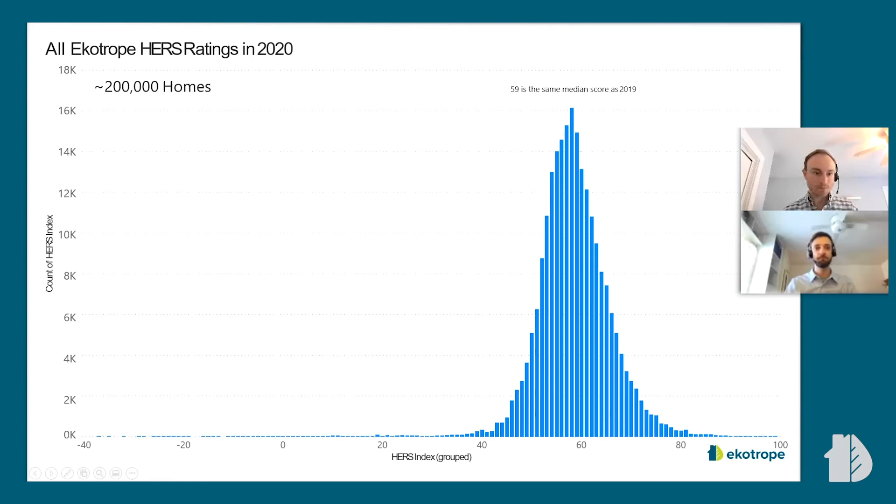Okay, now that we've laid the baseline, let's start things off with a little quiz. We don't have a live audience, unfortunately, but you can play along and try to answer the questions in your head. So a little competition, and I'll have Jake try to answer this question. What state would you say had the most of the lowest 1,000 HERS index scores that were done through Ekotrope in 2020?

Interesting. If I had to guess, I'm going to say the Ekotrope home state. I'm going to say Massachusetts. Massachusetts. Okay, keeping it local. I like it. Pretty good answer.

And it's a trick question because I'm going to give it a split decision. It's really hard to call between Massachusetts and Minnesota. Both had a very high share of those lowest 1,000 HERS ratings. So some really great building being done in both of those areas, and potentially correlated to stringent energy codes as well as good utility efficiency programs that are helping to incentivize builders to build efficiently.

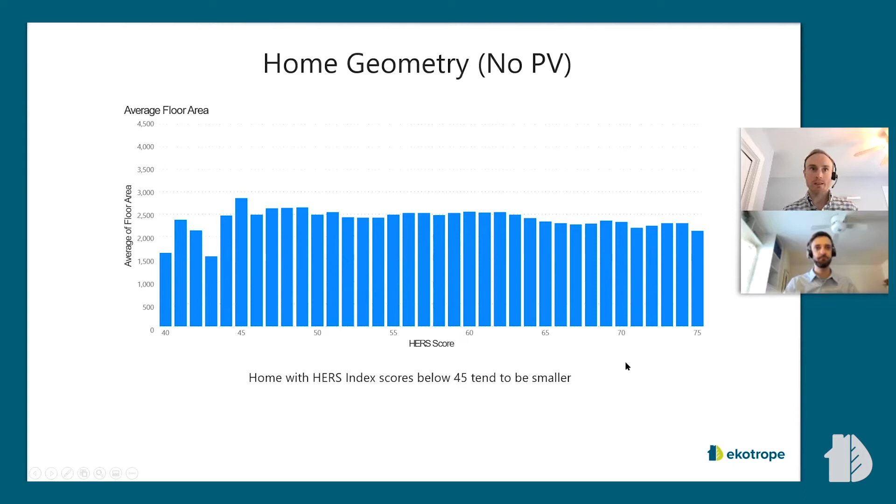But what you do see here in this chart is that when we get towards these really low HERS index scores, 40 to 45, that floor area average tends to drop. So you'll see pretty significant signal here in terms of the really low HERS index scores. Those tend to be smaller homes as well. So we'll dig a little bit more into that in future slides, but something interesting to see there.

Okay, next let's take a look at heating equipment. A very important aspect of the home's energy efficiency, especially in cold climates, is the heating equipment. So these charts are getting a little bit more complex, but let me explain what's going on here. On the top, we're looking at a distribution of the heating equipment type by HERS index. And then on the bottom, we're looking at heating equipment fuel type by HERS index. So the bigger the bar in each of these sections means a higher percentage of the homes in that HERS score range are going to be using that technology or that fuel type, right?

So if we start here on the bottom, looking at this heating fuel type by HERS index, you'll see that up here in the high HERS score ranges, 70 to 80 to 100, we've got a pretty big chunk of this dark blue bar, and that is electric. So you're seeing electric equipment on higher HERS index score homes. As the scores drive lower here to the left, we see a big chunk of this light blue. So as scores get lower into the 60, 50, 40 range, we're seeing the heating fuel type is dominantly natural gas by a very high percentage.

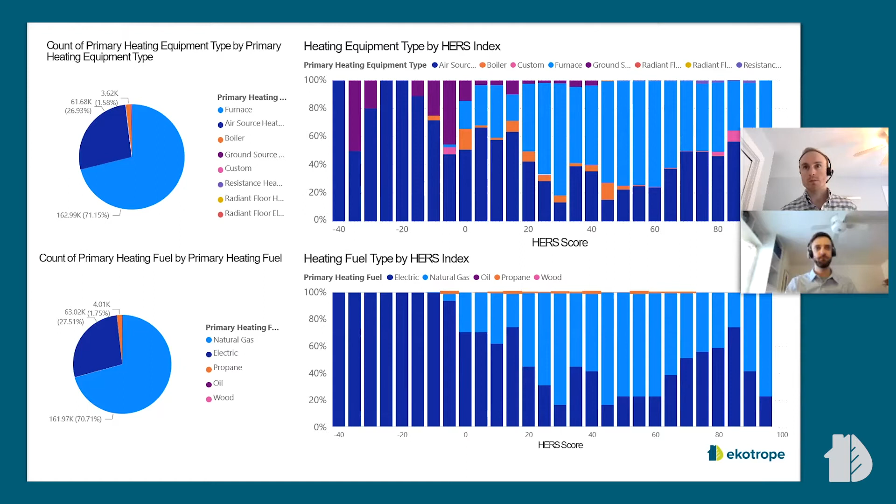Now, if we look a little bit deeper up here on the top and we break that fuel type into equipment as well, we see that this light blue matches up fairly well with the natural gas. So we're seeing that these natural gas homes are typically using natural gas furnaces. That makes sense. And the electric section is generally air source heat pumps until we get into these really low HERS index score homes. And then you start to see this dark purple up at the top come into play, and those are ground source heat pumps. So even more energy efficient than air source heat pumps as we start to get into those very, very low HERS index scores.

Okay, moving on, looking at both heating and cooling efficiency. So we've got heating on the left, just looking at AFUE for heating equipment. Cooling on the right, just looking at SEER for cooling equipment. And you'll see mostly the trends that you would expect, but with a little bit of subtleties.

So looking at heating equipment first, as we drive scores downward, moving to the left on this chart, we do see the AFUE rise. So more efficient heating equipment, getting up all the way almost to 96 once we get HERS below 45 in terms of an average AFUE. There's a little blip here around HERS 55 to 60, where heating efficiency actually goes down. Pretty interesting to see that. I think it's actually a bit of a misleading trend in the data.

I believe what's happening is that you've got a lot of homes that are in this HERS index range down in Arizona and Texas and climates that are generally fairly warm. So they are investing in cooling equipment rather than heating equipment. And so this is just kind of a chunk of southern homes where heating is not as important. It happened to fall in that range.

Over on the right, we've got SEER by HERS index. So interesting thing here is that it's actually pretty flat across HERS index scores until you get down to about a 40. So you do see a very, very slight increase, but mostly around a SEER 14, a little bit above a 14 average in terms of HERS index. And then it starts to drive up once you get to 40 and below. I suspect a lot of these homes here are actually mini splits or ground source heat pumps that carry both a high HSPF as well as a high SEER with them.

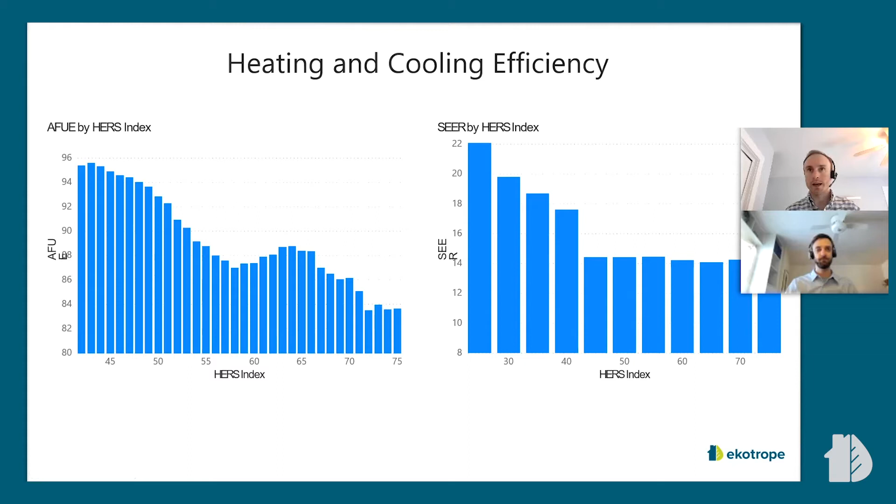Okay, let's break it up. Let's do another quick quiz here. So to the audience and to Jake, what would you say is the most common water heating fuel type among homes with the lowest HERS index scores? That's going to be interesting, especially from that last slide where you said a lot of homes in the low range move to electric, so they can have the solar, some split between natural gas and electric, but I'm going to say natural gas. All right, natural gas for the lowest HERS index score homes.

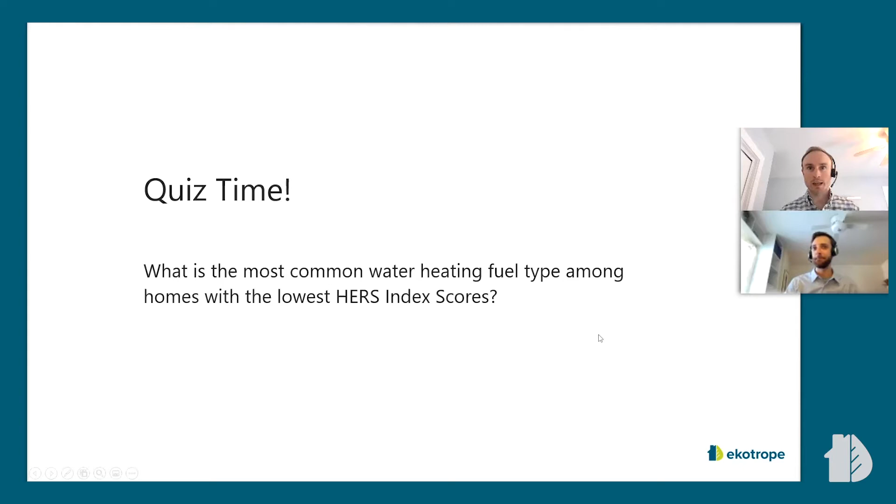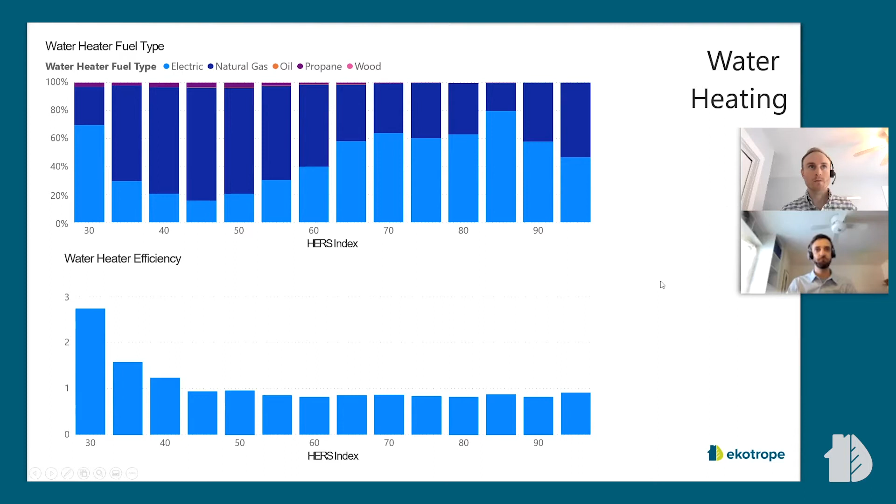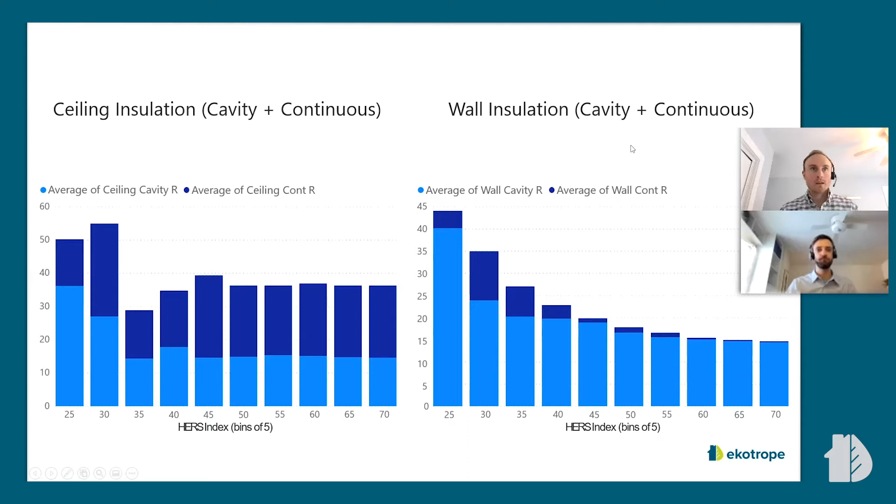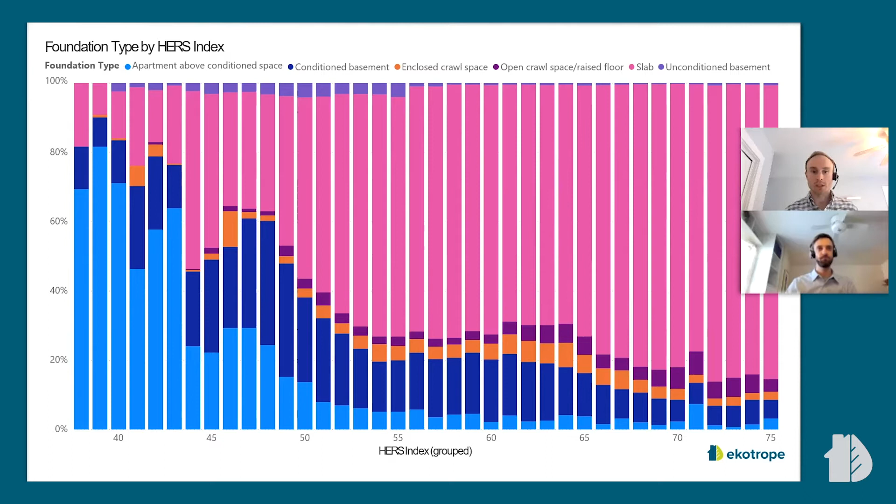And this is telling us that as you get to these really extremely low HERS index scores, you're actually mostly looking at multifamily units that are sharing common walls, common surfaces with other units.

Okay, let's do another quick quiz here. So we're going to be looking at mechanical ventilation next. Jake, would you expect homes with lower HERS index scores to tend to have higher or lower mechanical ventilation rates? Well, we've been hearing a lot lately about how everybody's trying to build tighter homes. It makes you wonder, right? Does that mean lower ventilation too, or does it mean up the ventilation? I'm going to say that they're cranking the ventilation. Higher ventilation, that's my guess. Higher ventilation for lower scores? Cool. Yep. Good thought.

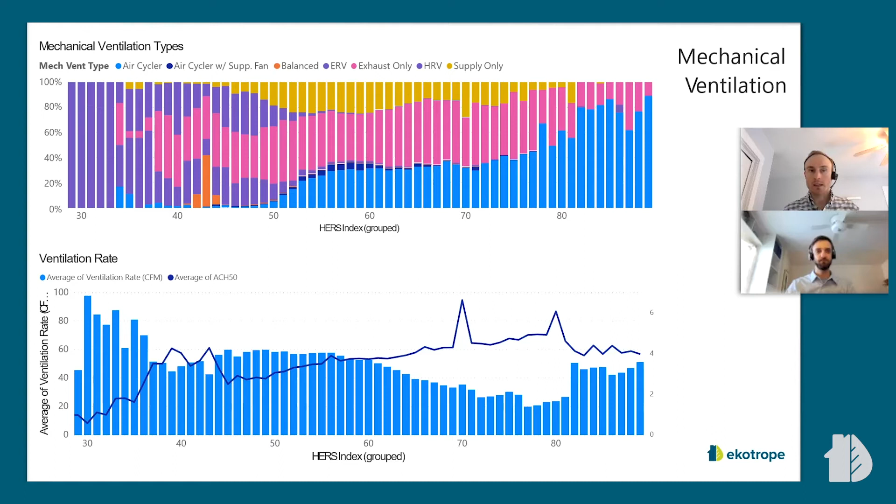So you kind of get that whole picture. Once you get down into this very low score range, you've got a super tight home, low ACH 50, you've got a lot of mechanical ventilation, and it's got to be ERV and HRV to recover that energy.

Okay, let's jump over and look at lighting as well. Lighting can have a really big impact on the HERS score. And in a HERS rating, you basically have three options for rating lighting. You've got incandescents, CFLs, and LEDs. They're called different things in the RESNET standard, but that's usually what you're looking at.

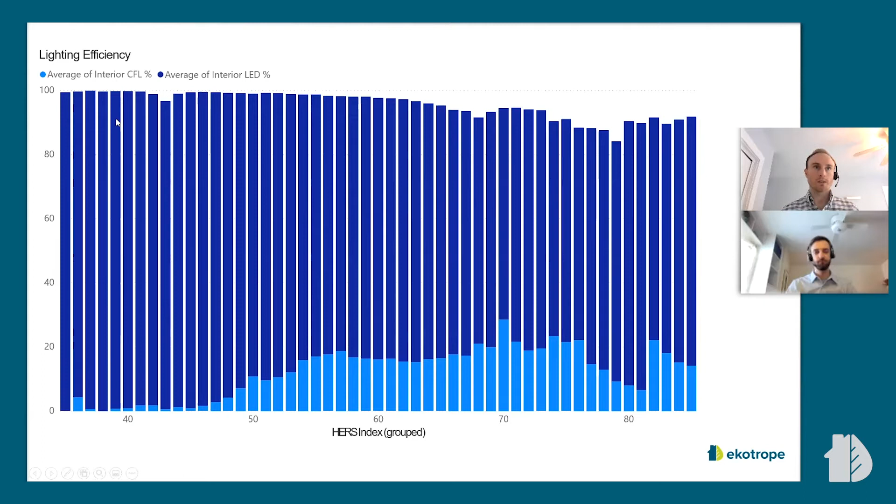But as we start to drive these scores lower, down towards 50 and below, we see there's pretty much no white space at the top here. So basically zero incandescent lighting. CFLs, this light blue, also drops near zero and to zero in some cases. So very little CFL lighting. We're looking at almost 100% LED lighting in these super low score homes.

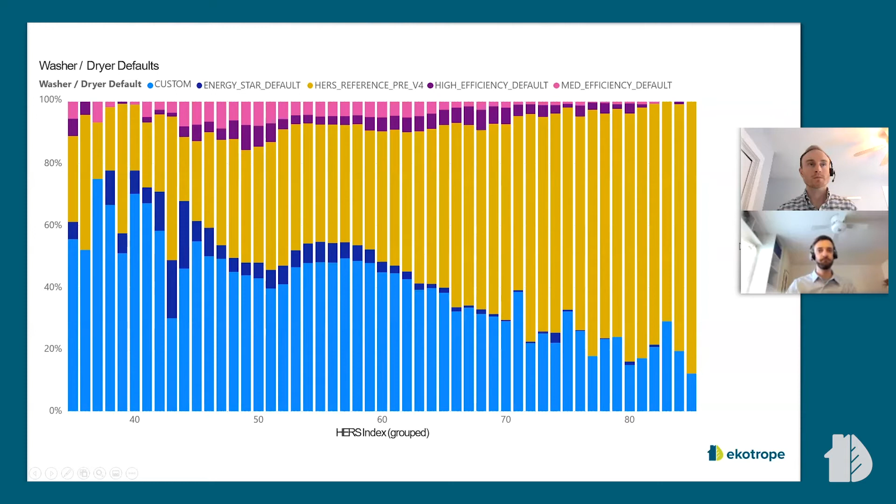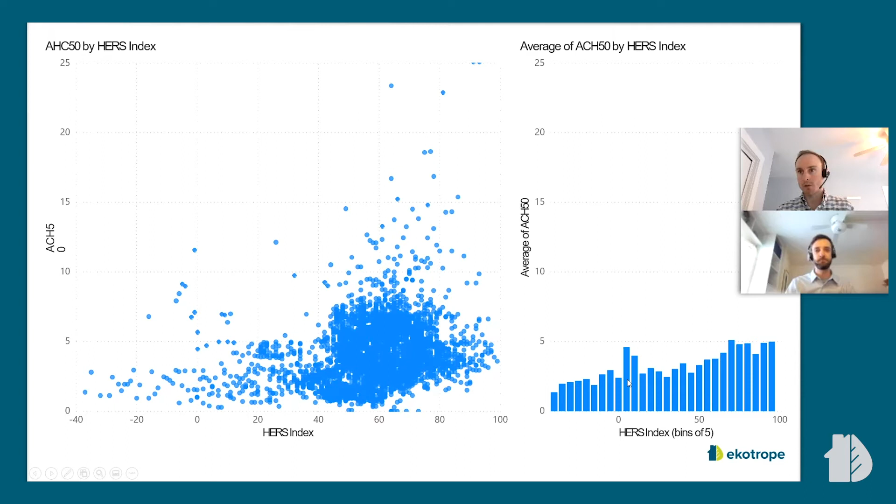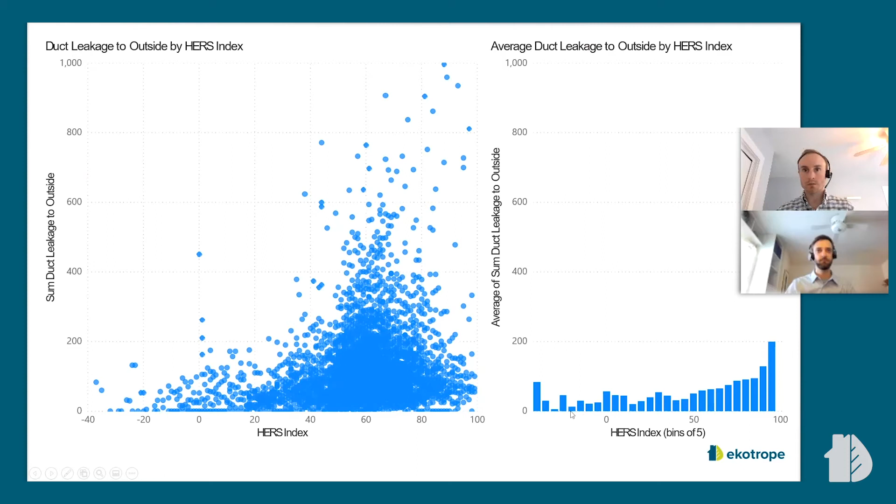All right, we're getting towards the end of this section. So let's do a final quiz here. So if we look at homes without PV panels, so without that supplementary power generation, what would you think, audience, and Jake, I'll have you answer this one as well. What would you say the lowest registered HERS index was in 2020 in Ekotrope without PV panels? I remember at last year's conference at lunch, we were talking with some raters and we were going around the table to see what they had seen. And if I recall, the lowest I heard at that conversation was a HERS 34. So I'm going to say 34. Let's see what happens. 34. That's a really good HERS score without PV. Extremely low number. Pretty good guess.

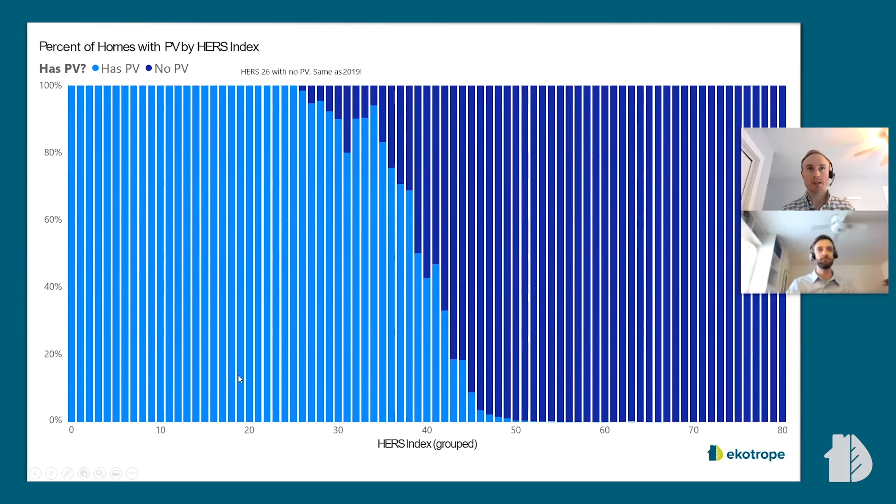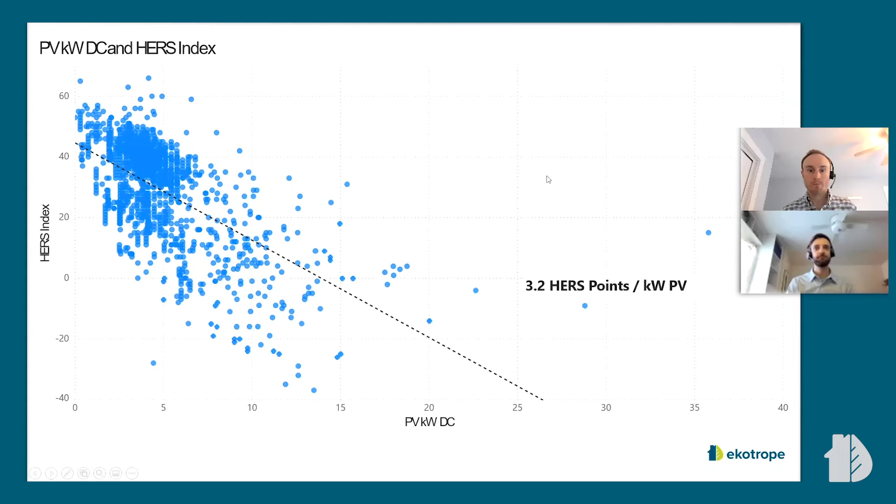All right, so we talked about how to get to low HERS index scores. I didn't mention anything about ACCA 310 because in 2020, ACCA 310 wasn't a possibility. In 2021, it will be a possibility, and a pretty exciting opportunity, I believe. So Jake is going to take over and talk about what 310 is, as well as what's the opportunity? How does it have a chance to impact ratings?

Yeah, thanks, Cy. And next year, I'll sign you up early. I'm excited to see the same presentation again with some ACCA 310 HVAC grading information in there. Absolutely, stay tuned. So yeah, I want to talk today about what is HVAC grading, get a lot of questions about what it's projected to be, how it'll tie into the HERS rating. And also we want to touch on, is it worth it? So without further ado, let's just jump on in.

So HVAC grading, we've heard about it, we were talking about it, and basically it's a way of grading the installation of an HVAC system on a home. And it goes on a grading scale of 1 to 3, very similar to what we're used to in insulation grading within the walls. The only difference here is that HVAC grading is, I believe it's billed as, the carrot without the stick approach, or in other words, there's only room for improvement. Your HERS score can only go down. It can't go up as a result of this, right? It's not meant to penalize people, but it is meant to provide benefits should you choose to do it.

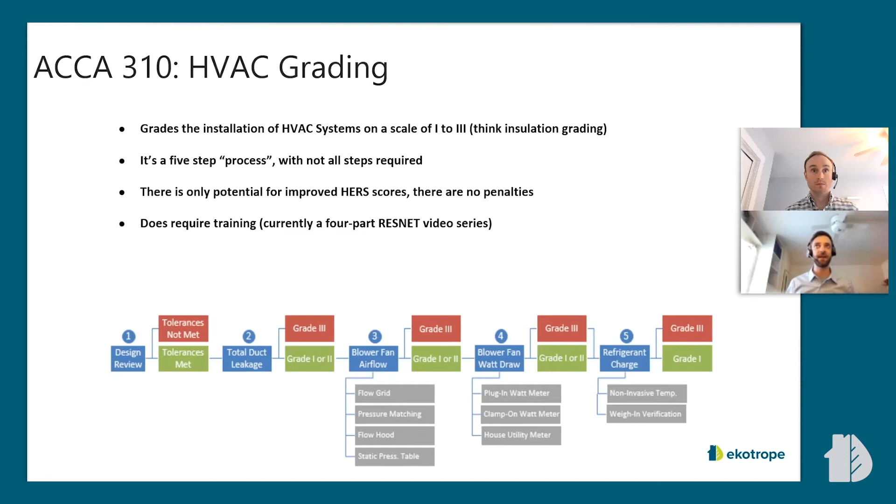And it's a 5-step process, of which not all the steps are required. So you can, depending on how you score, do all 5, maybe do 4 of the 5, maybe even 3 of the 5. And the final thing I'll note here is that it does require additional training. Currently, RESNET has a 4-part video series as part of their modules. So you will have to go through that training, which is subject to change, but as it stands now, one more thing to complete.

Moving on, let's just talk briefly about the grades that we have for ACCA 310. So again, 3 grades, just like wall insulation. Grade 1 denotes a high quality installation, right? Done a really great job setting it up. Everything's as it should be. This will give you the maximum possible score. The second grade, grade 2, is a mediocre run of the mill installation. You'll probably get some improved HERS score here. There's an opportunity for it, but you won't get the full effect of it.

In many instances, in order to move on to the next step in this 5-step process, you'll actually need to get a grade 1 or 2. There are instances where grade 3 disqualifies you from proceeding further. And that brings me to the point of grade 3. It is the quote unquote default grade. It's equivalent to what you get if you don't do the HVAC grading at all. So again, it won't penalize you, just removes the possibility for an improved score. And as I mentioned, it may prohibit further testing.

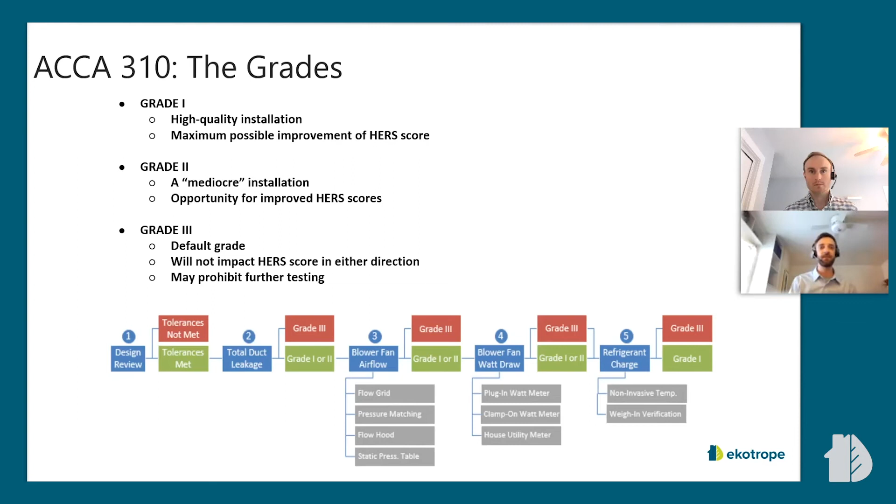So now let's talk about the different steps. Steps 1 and 2 actually should be familiar to many people. They're a design review and a total duct leakage test. And the reason I say that they're familiar for many people is because anybody who's doing an Energy Star rating or is going for an Energy Star rated home, they're required to do this test. So, this really won't require any change to your workflow, any change to your process. It's something you already should know. And these 2 things should be fairly easy to implement.

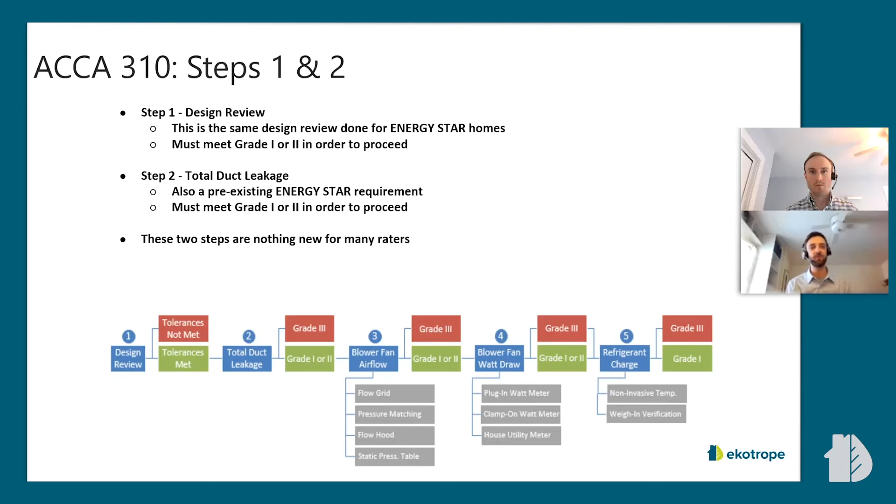Now, to get past steps 1 and 2, or in other words, to proceed on to step 3, you must actually score a grade 1 or 2 or better. Particularly on the duct leakage test, it's grade 1 or 2 or bust. On the design review, this is fairly pass fail. It's did you meet the tolerances or did you not? So again, steps 1 and 2, things that we're used to, nothing really new here. So let's move on to step 3.

Step 3 is the first, one of the newer steps that people may not be used to, or could be a wrinkle in things for some people. It is a test of the blower fan airflow. And there are 4 ways you can do this, 4 methods that are approved. You can do a pressure matching, flow grid, flow hood, or OEM pressure tables. And to briefly walk through, for instance, maybe the pros and cons of each.

Pressure matching, it contains tools that the rater already has, or very well may already have, so little cost to implement in terms of new material or additional calibrations. But there are limitations. Mainly, this isn't a great method for larger systems. May not give you the best results. You can use a flow grid, which they're easy to use. They work at the high flow rate, so better for these larger systems. But there is an accuracy penalty. They're not as accurate as some of the other methods, and they do require a little bit of additional setup. So it could be a little bit more time on top of everything.

There's also flow hoods, which are fairly easy to use. You have a flow hood, you stick it on there, and you see what it says. Only downside here is, they're large, they're clunky, and if you're in a smaller area, you may not be able to fit it in. Also, they can be cost prohibitive, right? If this is not something you're already looking at or doing, this is another piece of equipment that you have to purchase. It's a little bit on the pricey side, something else to calibrate. So one more thing to think about.

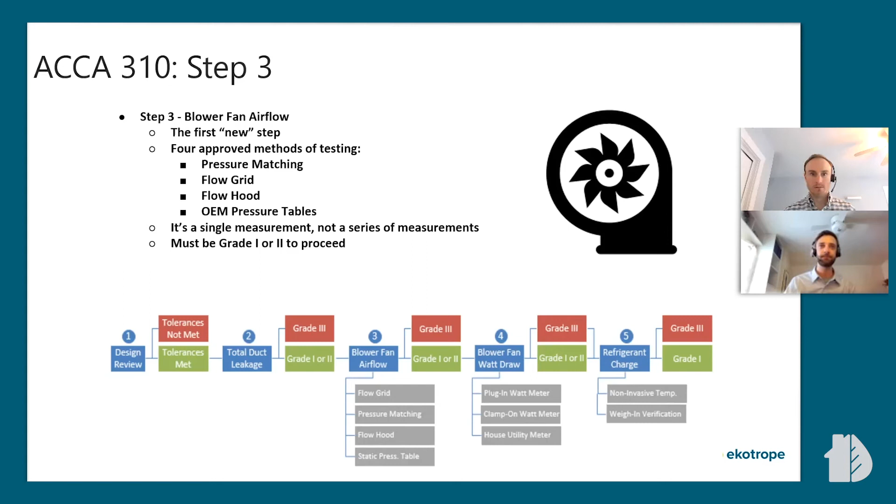So the next step, step 4, again, is a newer step. This is the blower fan watt draw. And what we're looking at here is, what wattage draw do you get from your blower fan? Fairly straightforward. They did a pretty good job of naming these, I will say. There's three methods you can use here to get this.

First is a plug-in watt meter, or in other words, if the system isn't hardwired into the house, and you can actually plug it into something, you can plug it into a watt meter and read the wattage draw and record your values that way. Oftentimes, though, you might find that the system is hardwired into the home, so that's not an option to you.

You can't actually get to the wiring. So you can use what's known as a clamp-on watt meter, which actually can measure the wattage by going around the wiring. They're great. They're fairly easy to use, but they do require some PPE and training requirements beyond that of the RESNET training. There's a level of safety there, and just again another level of training. So easy to use, but one more thing to consider.

The final option that you have is actually just reading the utility meter. And what you do here is you actually just turn everything off in the home. You flip the breakers, and you only run the equipment for 90 seconds, and you read the meter, see what it draws from the meter. And that's great, simple to use. It's probably already in the home. But if there are other trades on site or other things being installed, you will have to flip all the breakers. That may require an additional level of coordination.

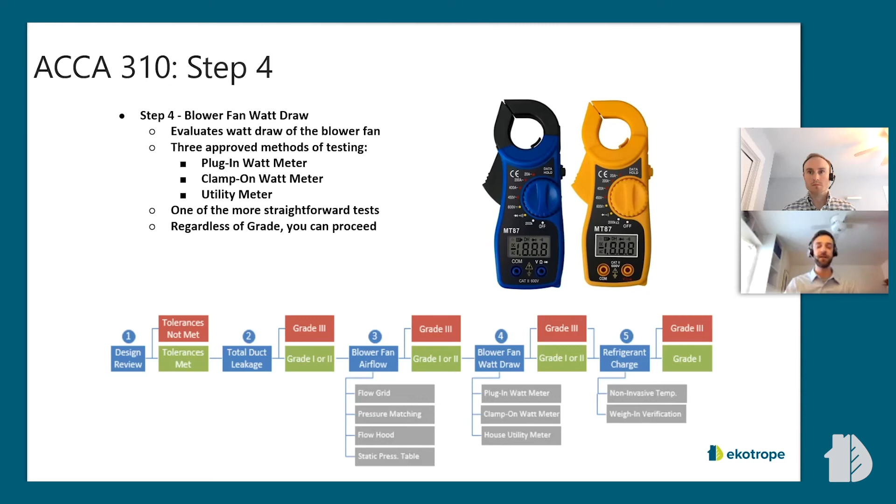So the other interesting thing about this is that you can proceed whether it's grade 1, 2, or 3. Now, you're only going to get credit for grades 1 or 2. Grade 3, you will not get any credit, but it won't prevent you from going on to step 5. So no matter what, you're good to go.

Speaking of step 5, this is the one that when people call me and ask me, what's this HVAC grading thing? When are we going to be able to do it? What's it about? This is the one that they're always the most hesitant on. This step measures the refrigerant charge. And really, it's just an evaluation on how well that system was set up. And the biggest difference right off the bat is it's pass fail.

So, with the exception of the design review, every test thus far has been grade 1, 2, or 3. Well, with this one, there's only grade 1. There's no grade 2, or you can have a grade 3. So, you're either going to do great or you're not going to do anything at all. That's just how it is. And now there are two ways to do this test.

And it's worth noting right now, right off the bat, nobody's asking you to charge refrigerant systems, to kind of break into them, play around with them. We're not going to become refrigerant experts overnight and get a whole new level of certifications. And I wanted to say that up front because one thing I always hear on the phone is, oh, they're asking us to tap into refrigerant lines. We're going to do certification. It's going to take a lot of time. It's not really the case.

In fact, the invasive method is actually just comparing air temps and refrigerant line temperatures, right? So we check the air that's coming out of the machine, going into the machine. We check the various refrigerant lines, see what temperatures they're running at. And we actually compare that to a spec sheet. So really, it is called the invasive method, but despite its name, you're not actually tapping into anything. You're really only just checking temperatures.

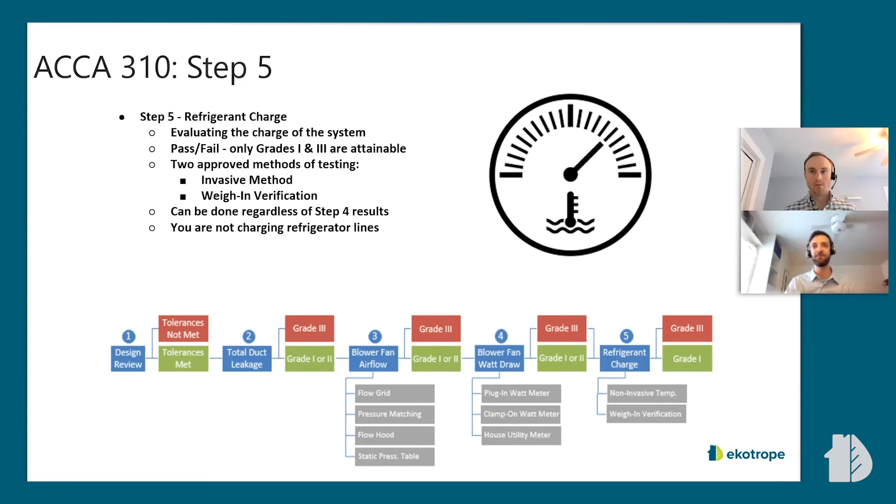Basically, once you have your weights and parameters, you then just go to a spec sheet to see what a system of this size and type should have and see, do I pass or do I not? And by that nature, that is why we have only a grade 1 or grade 3. It's a yes, no, do you meet it or do you not? It's very IO. Doesn't require any special certs other than the training that you get as part of being able to do an HVAC grading. But it's a little bit safer than I think people are really worried that it will be. And again, it's all very much doable within the realm of a HERS rater.

So, with that said, the second most common thing that we hear when people ask us about this is, hey, this is going to add hours to my rating process. It's going to take me a ton of time to do. I'm probably not going to do it just for that alone. And to that, I say fair, right? Anything that's new will require time, especially if you've never done it before. It's going to take more time up front, and hopefully, time will decrease as you go on. You get better at it, it becomes a faster process.

When RESNET was making the standard and when they were testing it for the first time, they actually recorded some of the times that it would take. And they found that on average, once they got used to it, they were cranking out the entire test in about 26 minutes, so just shy of 30 minutes. Now, there was a caveat, which is that the equipment does need to run for a period of time prior to doing the testing. And the caveat here is that preconditioning, that pre-running, was done during the first two steps of the process, the design review and the total duct leakage. So again, a little bit of coordination there, kind of shift the numbers down a little bit.

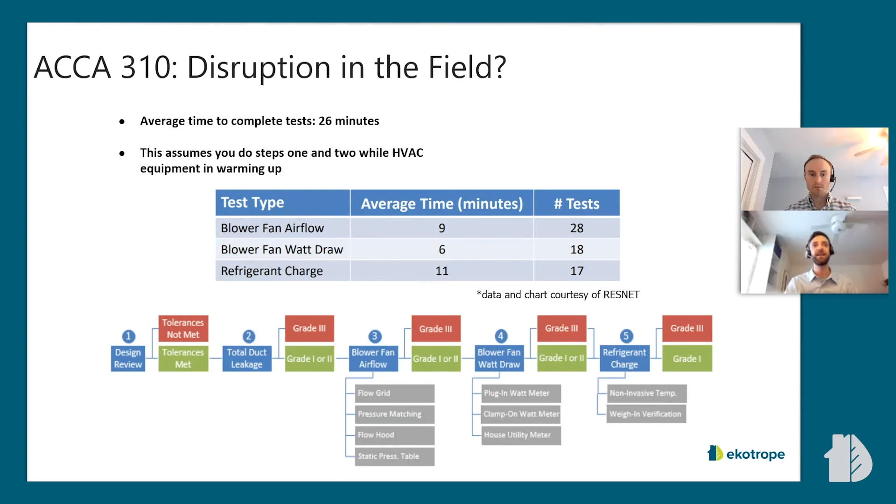But as we look here, the average time for most of these tests, 10 minutes each, with the watt draw test being the shortest, 6 minutes. And they only did a handful of tests. If you do multiple of these throughout the years, you might be able to even get this lower. So I can't say that the modeling, the looking up, the paperwork aspect of it will only take 30 minutes. But the on-site time where you're actually doing testing, 30 minutes or less isn't terrible. I've been hearing people talk about 2 hours, 3 hours, and it may not be that bad. But to be said, it is additional time, so it does beg the question, is it worth it?

So again, as part of the setup and implementation of this, RESNET, along with NREL, National Renewable Energy Laboratory, tested a set of homes. They tested homes with air conditioners, homes with heat pumps, and homes with furnaces. And so what we're looking at right here is homes with air conditioners. And in the lower climate zones, or the warmer ones, we see that with air conditioners, there's actually room for a few HERS points here, right? In climate zones 2 and 3, we see a change of 3 to 5 HERS points. So there is opportunity. If you need those extra scores, these lower points, it might be worth your while. In climate zones 4 and 5, however, the opportunity definitely diminished, right? So it may not be worth the time in that instance.

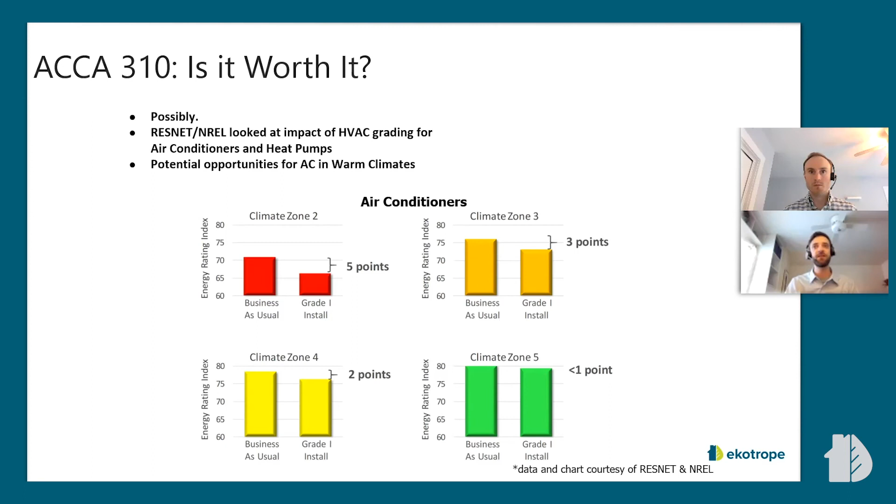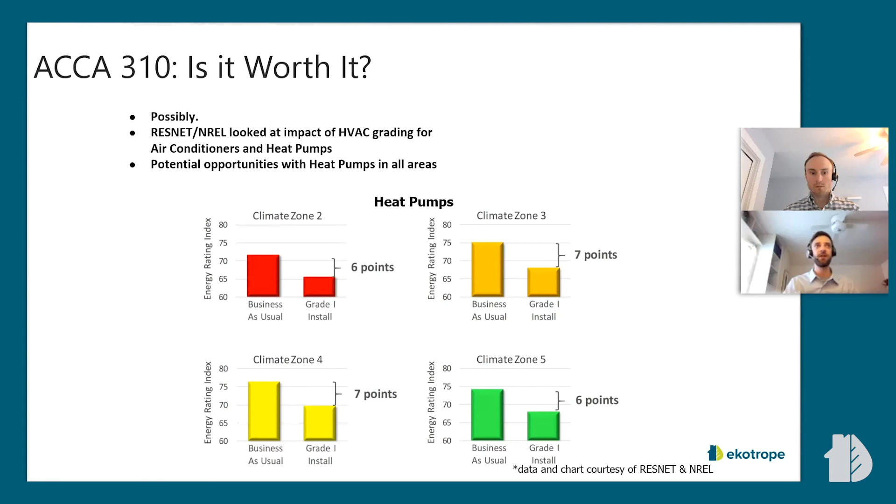The other thing that they mentioned was the software they were using was in a pre-release version that was specifically designed for this testing, but not yet ready for testing at large. So there might have been some assumptions made. There could still be some changes to the way the algorithms are created. I'm not sure which software they used at the time. It definitely wasn't Ekotrope. We weren't asked to do this, but it is definitely a work in progress. And as this comes online, I anticipate that they'll be doing more tests, or in fact, they've probably done more testing since then, and we'll have more conclusive data.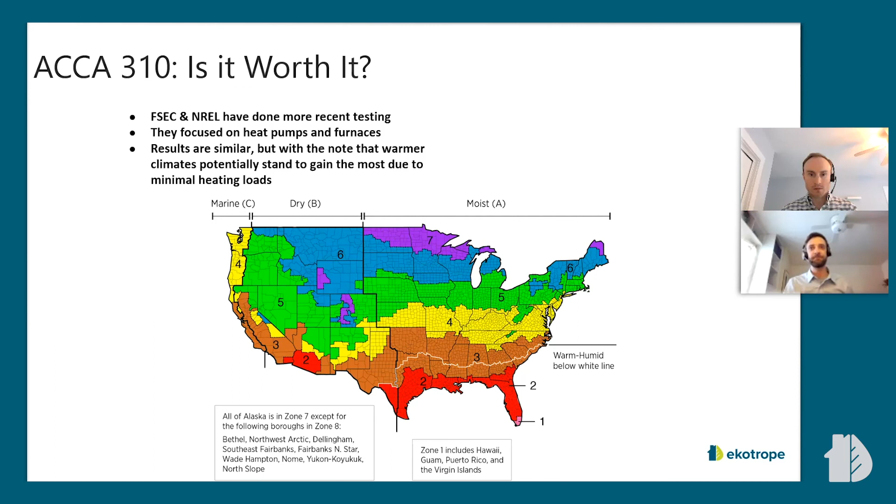So that being said, we see that there is room for improvement. We see that there's opportunity to drop the HERS score, but a question that we must ask ourselves is, okay, I can get 6 or 7 HERS points, but is that on every home, or is that really only like 1 or 3 homes? What's the deal? And the good news is that the majority of these homes that they tested on these newly installed systems, they've gotten to the grade 1 or 2 category, right?

So again, wrapping it all up right now, HVAC grading, it's maybe not as long of a process as we initially thought, maybe not as arduous of a process as we initially thought, and there's an opportunity here for many homes to really reap the benefits of it. So definitely something I'd encourage everybody to consider as it rolls out and becomes available.

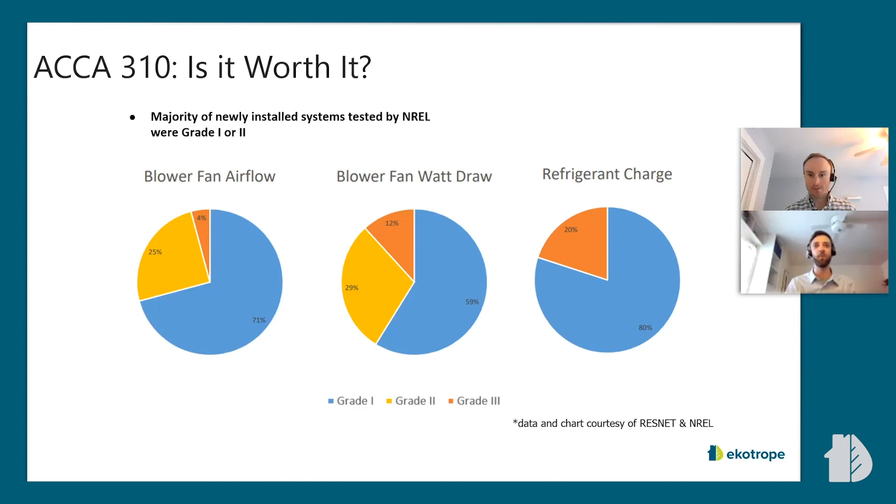Thank you, Sai, because aside from the what of the HVAC grading, the when was the second most requested question, and thanks for answering that for our viewers.

Alrighty, so the last bit we're going to do here for a wrap up, a little bit of bonus material, is cover what we consider advanced modeling questions, questions that are beyond the very basic scope of how do I do a HERS rating, how do I input walls, input a slab, input mechanicals, things slightly beyond that. We'll cover some common questions, maybe throw a few tips in there, and point out some opportunities that we see, room for improvement. So the first one that we see a lot is actually errors in modeling duct leakage to outside.

So for a while, there was the opportunity to take an exemption doing a leakage to outside test. And if you took this exemption, you could just claim that you had zero leakage to outside. And I believe that was prior to July 1st of 2019 on the permit date of the home. So there might be a few stragglers still following that rule, but not the case anymore as we move into 2021 here. Expect to see a lot newer permit dates. And beyond that, there's a rule that if you are not doing the LTO, if you meet certain requirements, then you take an exemption.

And if you're going to take this exemption, the way to do it is not to enter zero, but rather there's this little box in Ekotrope that asks, have I taken the leakage to outside test? If you have, great, you check it. If not, you uncheck it. And there's a little handy flow chart here that basically breaks it down. So, right, did you do the test? Yes. Was there actually no leakage? Yes. Then you can enter zero.

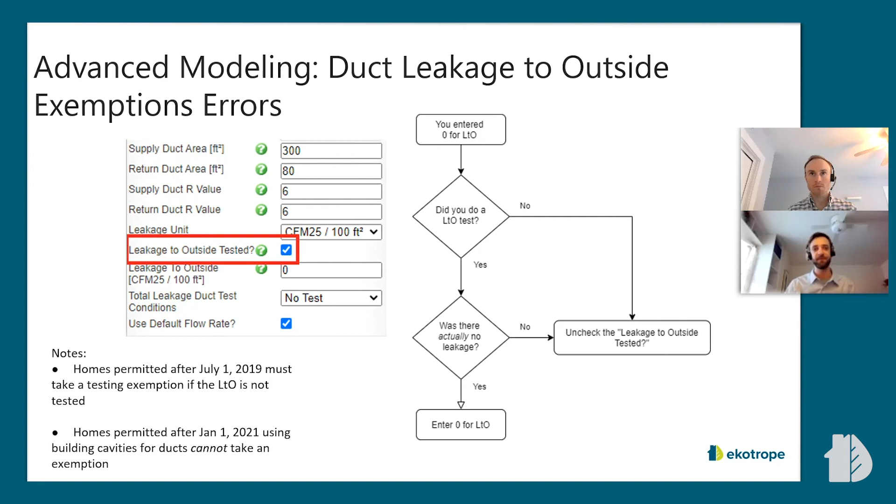As a brief note, as it stands right now, actually, we're beyond this. As it stood prior to January 1st of this year in 2021, it said that if you had ducts in building cavities, then you could use this exemption. But for all new homes, we've moved into this period where if you have the ducts in building cavities or they're using building cavities, then you cannot take the exemption. So you have to do the test. So just another note to be aware of.

Second question that we get asked a lot is, hey, I have my home and I'm looking at the mechanical equipment that's in it, and it has an ECM motor, right? An electronically commutated motor, which basically means that the fan speed can change. It's not set it and forget it. There's a little computer or something going on there that changes how fast the fan's spinning, and we have the ability to select between the two.

So with an ECM motor, it's more efficient on the whole, but by itself, you won't see that change. For instance, if you go from a PSC to an ECM, you might actually see that the home's performance decreases ever so slightly. The reason behind that is the change of the motor itself isn't quite enough to be more efficient. In fact, according to ASHRAE 152, these ECM motors actually have a higher duct loss. So on their own, you might see a little bit negative savings.

The real savings actually comes from the auxiliary electric, the EAE column here. If you were to look at an equivalent system that has a single speed motor versus a variable speed, you'll often find that the EAE is lower for that variable speed motor. So that's really where a lot of your savings comes from.

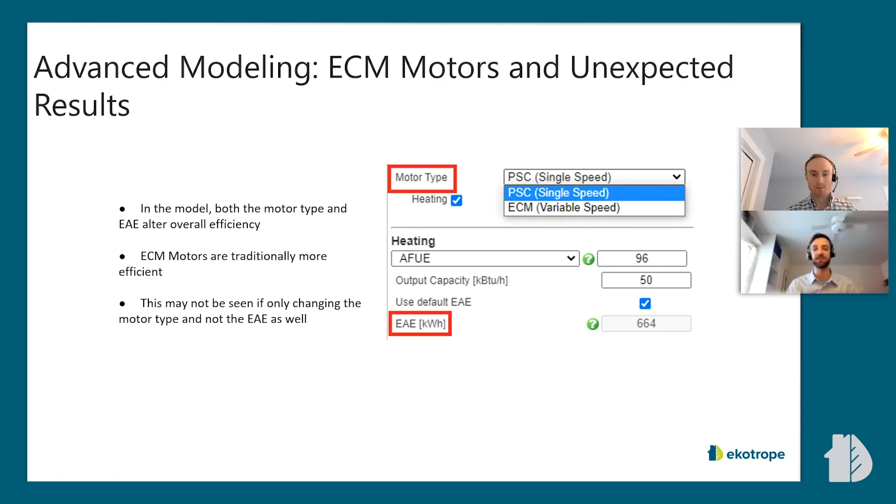So the next question we often get is high scores with mechanical ventilation, right? I get the question, hey, I added mechanical ventilation. Why is my home not doing well? What's going on here? I thought more ventilation is a good thing, especially given what we saw earlier. Those lower HERS index score homes do have a lot of ventilation. So it's important to remember here what the winning combination is.

Let's go back to the slides earlier. He pointed out that yes, the homes with the lower HERS score have the highest amount of mechanical ventilation, but they are also built incredibly tight, or in other words, they have very low infiltration values. We were seeing ACH50 values of 1, maybe even less, so that 0.5 to 1.5 range. That's really going to be where you get a lot of the benefit.

If you have a home that's already fairly leaky, in that 3 to 5 range, and then you add mechanical ventilation, then really what you're doing is just creating more air that you have to condition, especially if you're using an exhaust only option, or a mechanical ventilation system that doesn't do any preconditioning for you. So that is one of the reasons why you might see worse scores even though you've added ventilation.

Another thing to point out is, if you have to choose defaults, for instance you can't measure the flow rate or you have to use the fan wattage default, then we're going to have to automatically calculate those values based off ANSI 301.

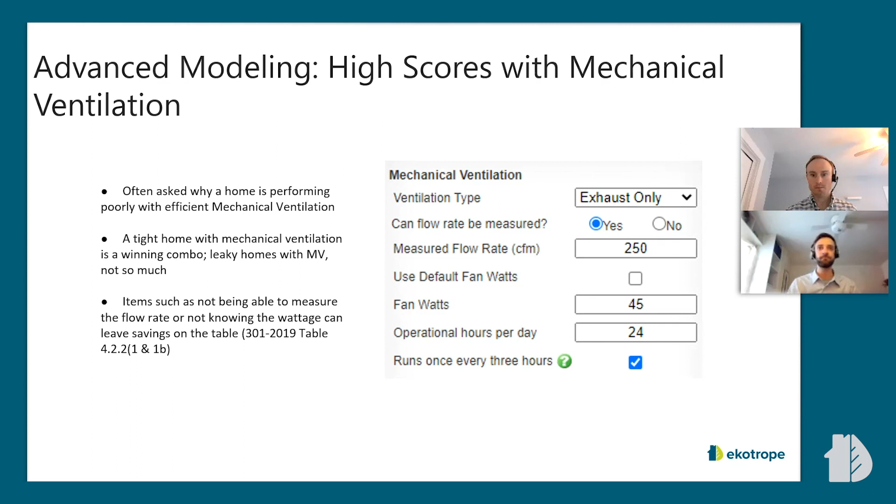So one of the last ones we'll talk about here is duct testing exemptions. And we get this a lot. People saying, "Hey, I'm taking a duct testing exemption. I don't want to do the test, but it's only a 12% penalty. Why am I being dinged so harshly?" And I think one of the biggest misconceptions that we have here is that saying that it's a 12% penalty is not the same as saying that you have 12% leakage.

What this penalty applies to is something called the distribution system efficiency, or really how efficient this distribution system on the whole is operating. And that's looking at more than just leakage. So when you take this exemption, you are getting a distribution system that's only 88% effective, right? You're chopping off a large portion of that. And now let's say you're in a scenario where you're trying to eke out the last few bits of HERS points. Maybe you're up against code, you need to get there.

Even though it takes longer, it might still be worth it to test your ducts, even if they're entirely in conditioned space. Very leaky ducts, I'm talking really leaky ducts, 12, 15, 20%, will perform better than a system that has taken the duct testing exemption pathway. It's a lot more restrictive than I think a lot of people are led to believe. And so my final parting word here would be, if you need the HERS points, if it's possible, do the test. You will pretty much always come away better, even if everything's in conditioned space, by doing the test than by taking the duct testing exemptions.

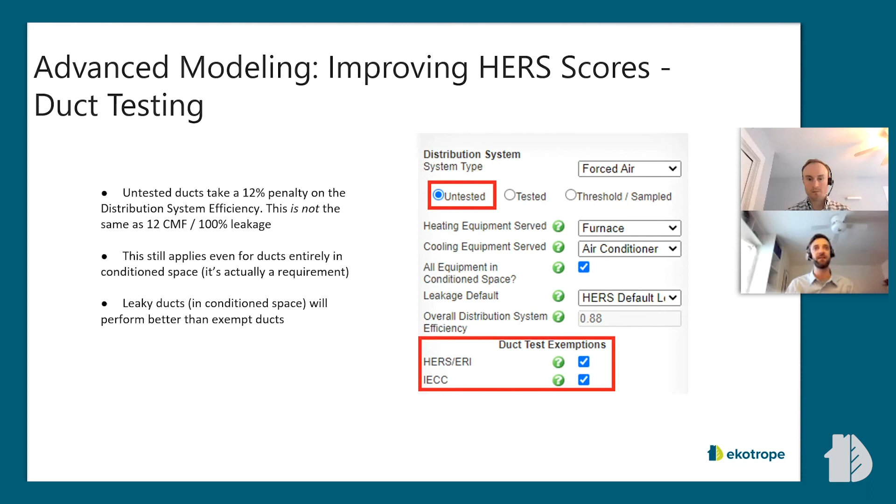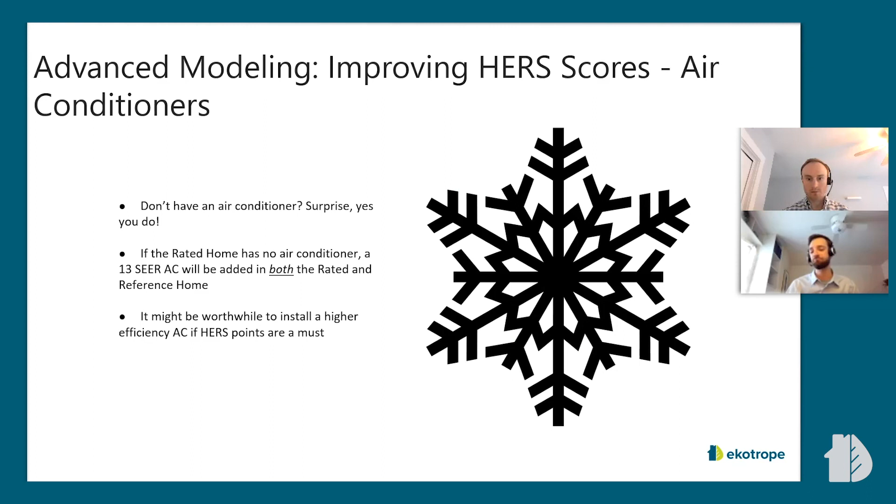So that really does it for all of the items that we had for today.